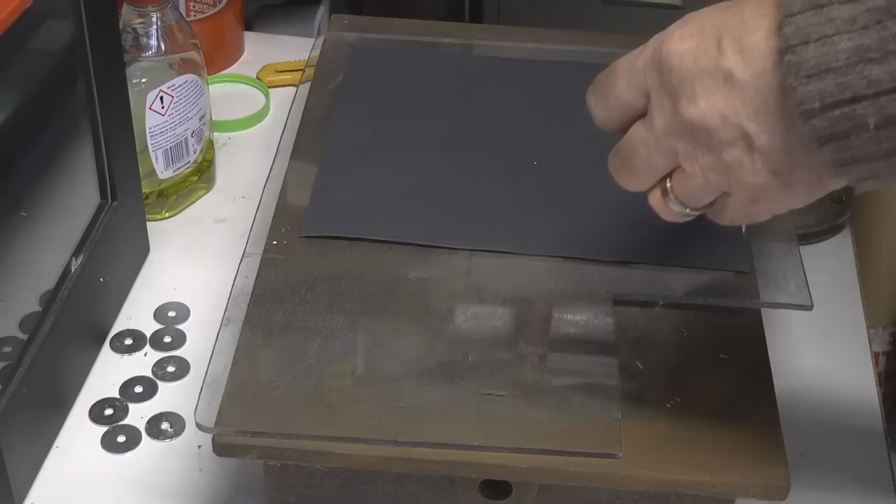I'm still a bit obsessed with making copper mirrors because I do believe that they are going to be a very cheap option that most people could make for themselves, provided we get the method of manufacture correct. And I'm tackling the problem a slightly different way today.

I have here a sheet of 1200 grit wet and dry, which I'm sticking down to a piece of 6mm Makrolon, which is nice and flat. But the main difference between this and the previous approach that I had was that I'm making all three together. Here I've got a piece of 1/2 inch thick steel.

Now it doesn't have to be steel, it probably could be 1/2 inch plywood, for example, and it would probably work just as well. But what I've done, I've fixed my 3 mirrors with screws. If you remember, my mirrors have hank bushes on the back. So I've got my washers there which are pulled back against this flat surface.

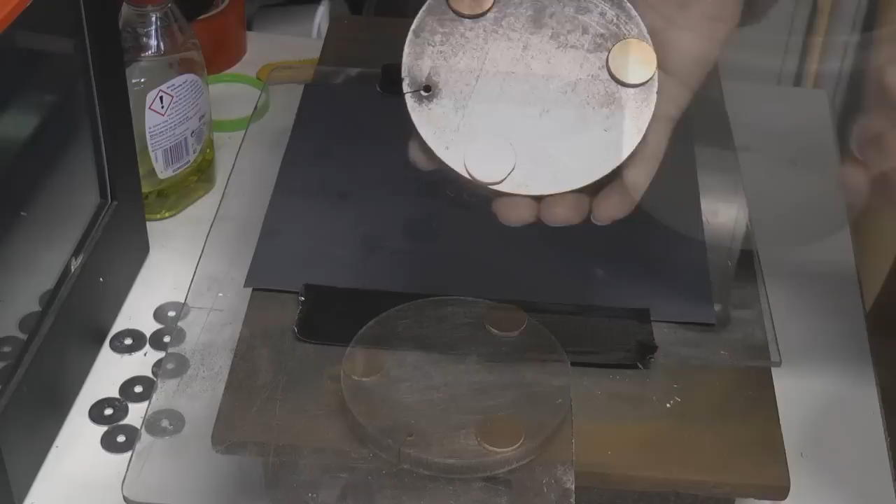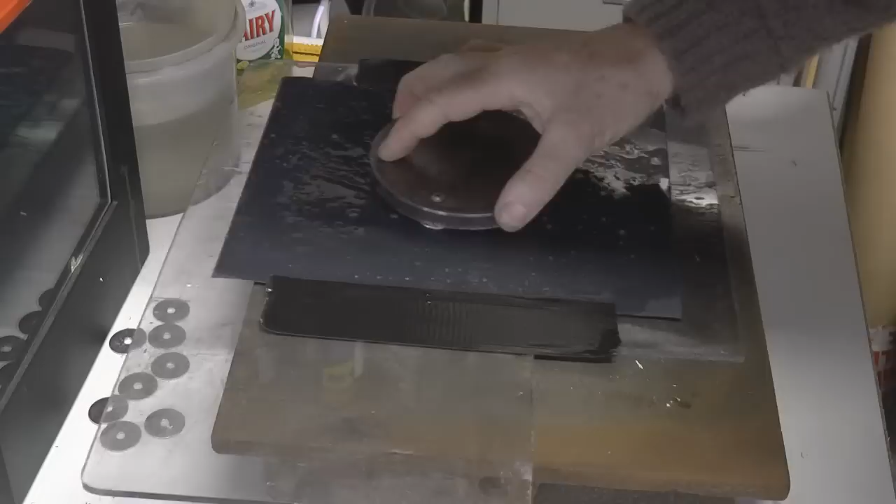Add some water and some washing up soap, and we'll see how flat we can get these. Now I've been told that the ideal thing to do is to work these in a figure 8. And also to keep rotating them.

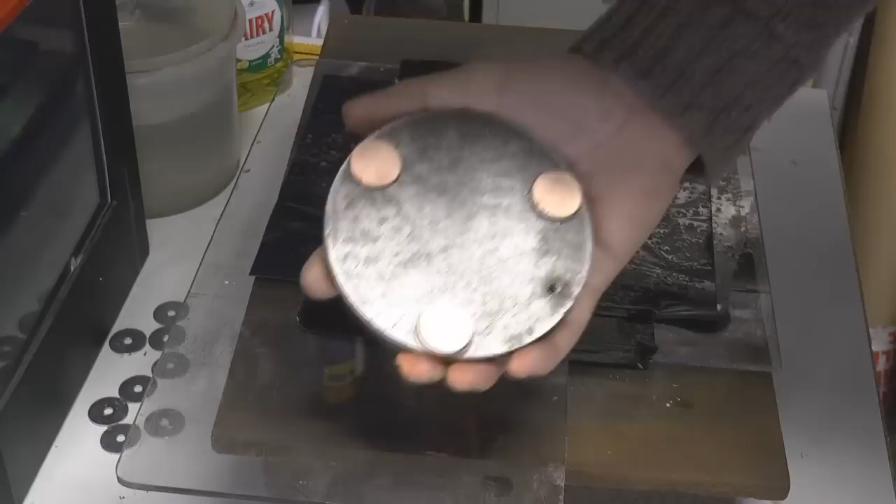Now this is quite heavy, so I'm not applying any load to it. All I'm really doing is just moving them around. Now I've got no idea how flat these are at the moment relative to each other. Well, I think the answer to that question is they're not bad, because there's just little spots on there at the moment that have not cleaned up. But they're not bad for flatness.

So it's not going to take very much effort to whittle these back to flat. Well, 2 out of the 3 look fairly flat. That one there looks as though it might require just a little bit round here. They're coming flat very quickly.

Now I know that polishing with cloth is likely to round the edges, but as we're only interested in the central 10mm section, it won't really matter if the edges get a little bit rounded, but cloth will do a great job bringing the polish up quickly. Now what I'm going to try and do is to stretch the cloth on here and tuck it over.

Now here we've got our polish that we're going to use. It will naturally get spread around once we start working it. And again, I suppose for the purists we ought to use the figure 8 technique. Again, I'm just moving this plate around. The weight of the plate is quite heavy. I mean, it probably weighs, I don't know, 4 pounds.

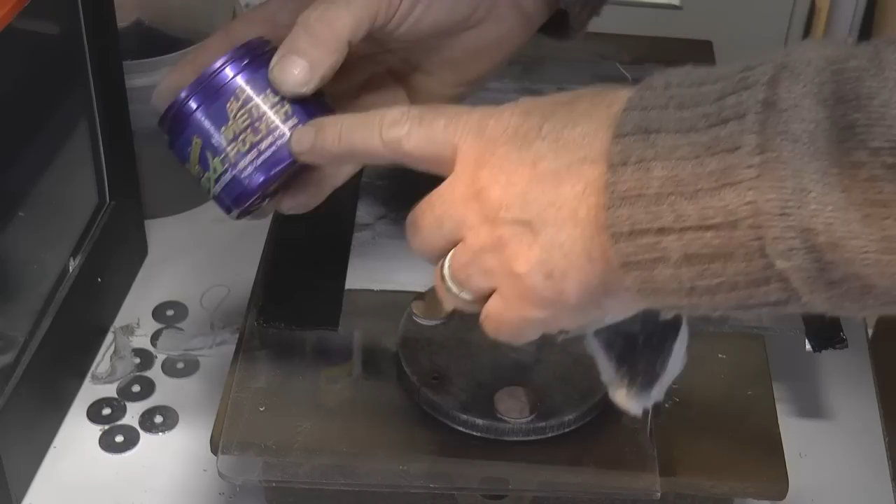Now, I was a little bit worried about not cleaning the polish off of this surface, as it's got anti-corrosion protection in it as well. So it leaves some sort of surface film over the copper, which on the one hand will help to stop it tarnishing in the atmosphere, but on the other hand, potentially it could burn onto the surface and change the reflectivity of the surface.

But it doesn't appear to be doing that at the moment, so I'm not going to clean it off. That's 5 minutes worth of wet and dry, and 5 minutes worth of polishing. They've come up extremely well. So it's taken 10 minutes to produce 3 mirrors, plus about another 15 or 20 minutes to make the mirrors.

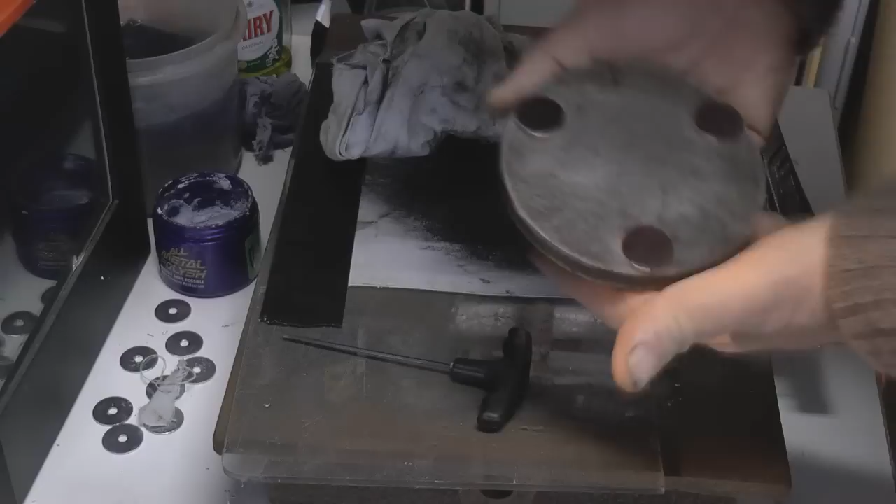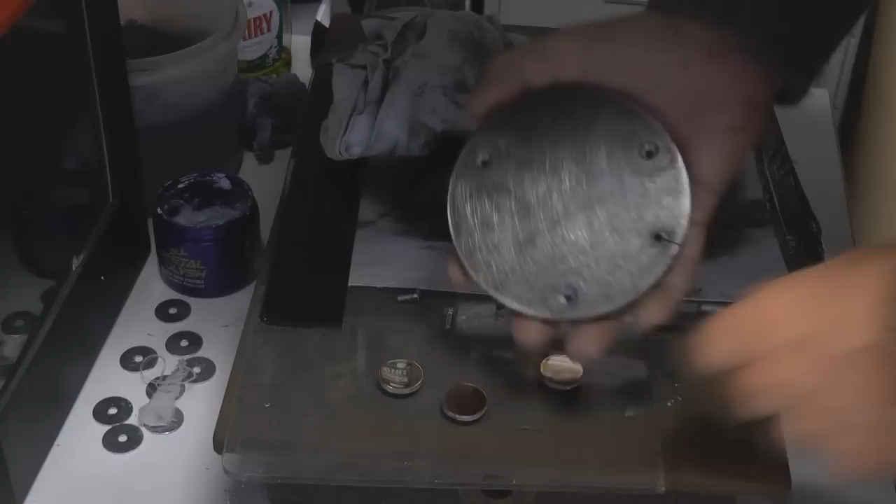So, if I've spent an hour in total making 3 mirrors, that seems like a pretty cheap set of mirrors. Let's go and find out how they work, should we? Because these, I think, are the best mirrors that I've produced. And there's my plate with counterbored holes in it to take the hank bushes. These are round hank bushes as opposed to hexagon ones.

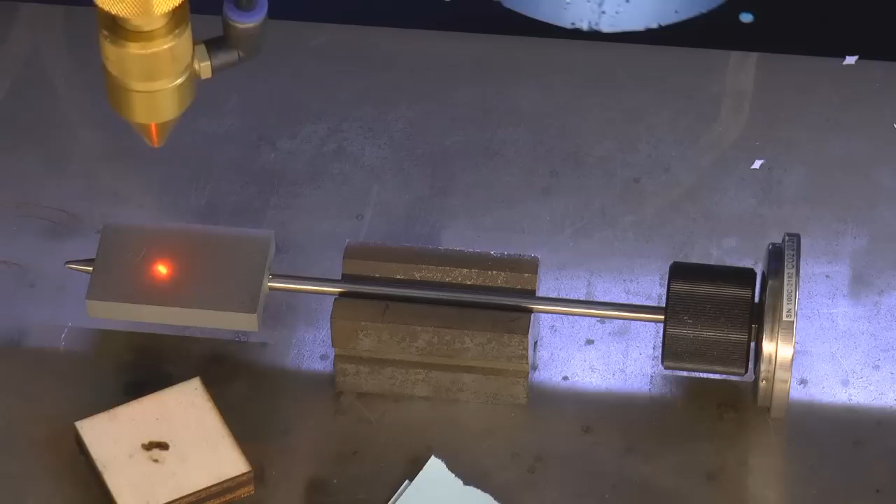Well, we've got a few consistent results there, so I think we'll quickly change the lens. So if you remember before, in a previous session, I mentioned to you how dangerous this zinc selenide is. It's actually a very toxic material, and after I'd read the data sheet, you won't see me handling these lenses again without my cotton gloves on.

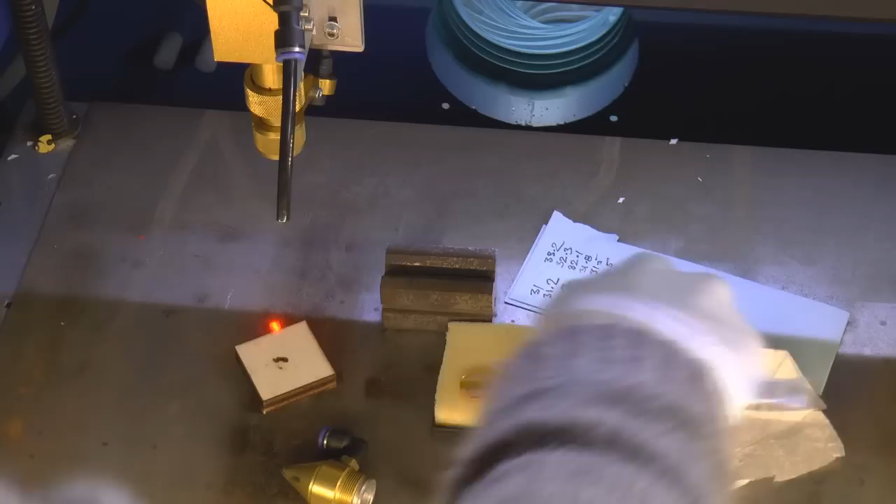Well, that's the new lens. It's an HQ lens. Now, whether or not it means it has any better surface reflectivity, I don't know, but we will just have a quick comparison with the lens that I'm going to take out. It almost looks as though that isn't coated at all, but having said that, when you hold it up to the light, when you catch the light across it, there is a bit of a surface coating on it. It looks a little bit misty and cloudy on that surface there.

Zinc selenide only transmits in its raw state without any protective coating on it. It only transmits about 70%, the other 30% is reflected, which is why we go for coated lenses, because that coating can actually raise the transmissivity of this lens to as high as about 99.5% or better. So I'm very hopeful that I'm going to get probably another 2 or 3 watts out of this head now. So we just make sure we put this in the right way, which is convex side away from the work.

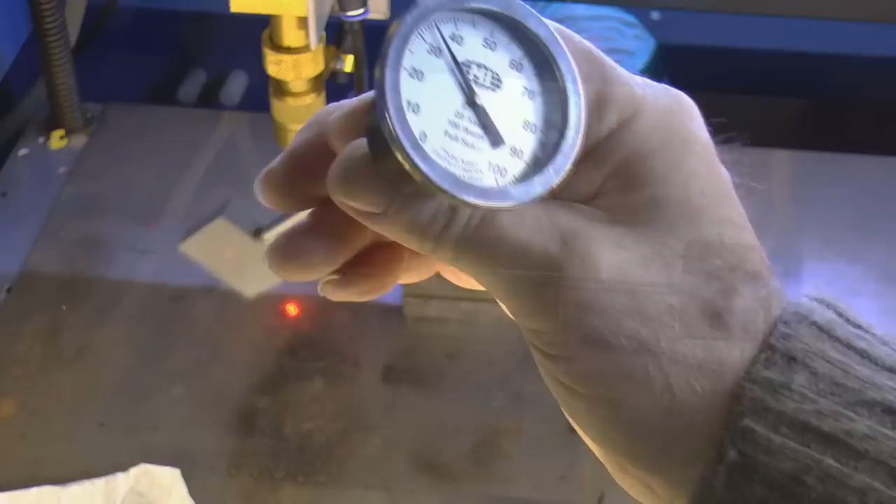So that's about 34.2. So if we take a look at those results there, we see typically, well, if we're kind about this, we say we are nominally 32. And if we look at these results here, well, they started off low, but they seem to have settled down quite a lot higher. Judgment call, what should we say, 34?

Now 2 watts doesn't seem a lot, but when you consider I was typically calculating 8 to 10% loss through the lens. So if we started off with about 33 watts before the lens, then we'd finish up with about 30 watts after the lens with a 10% loss. So it means we were losing 3 watts through the lens. Now it would appear that we're only losing 1 watt through the lens, which is a significant gain.

So now what we should do is work our way back through the system. We'll put my new set of copper mirrors in to see whether we can wring any extra watts out of the performance of this machine. Well, I'm now going to upset my mirrors and change the mirrors, so it means I shall have to take them out and physically upset all the settings. But before I do that, what I'm going to do is to set up my pointer so that we don't have to go back and reset everything. I should be able to just use this as a reference.

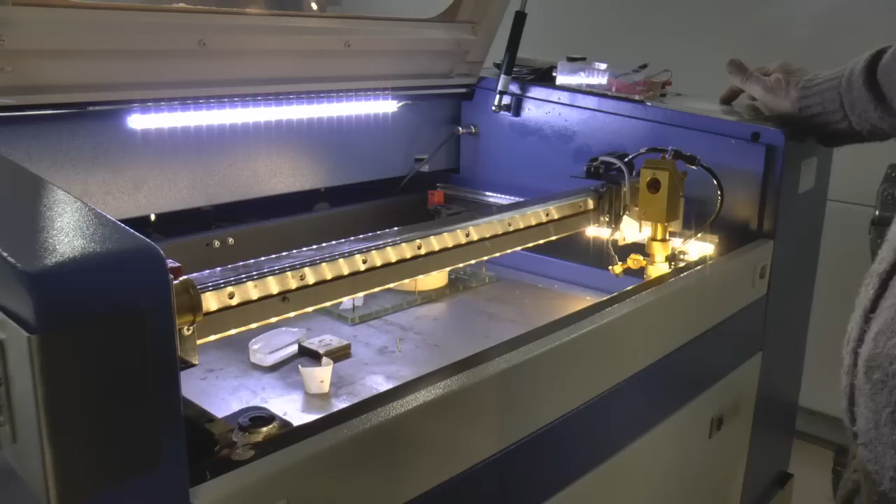Right, before I upset any of my settings, I'm going to put the laser right at the front of its stroke where I can get to these screws here, and I'm going to do a little pulse test just here. I might need to tweak that at a later stage, but that's where the laser is pointing at this very moment in time. So now what I'm going to do is turn the laser off. So the laser is now turned off and safe.

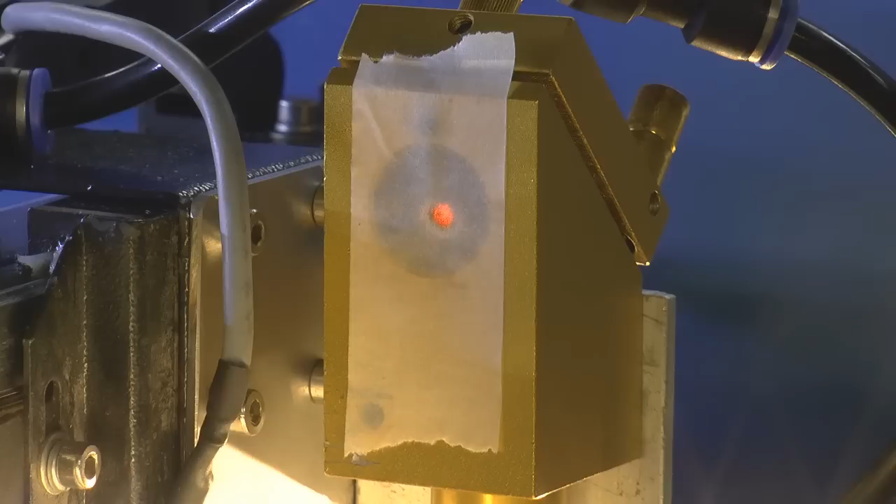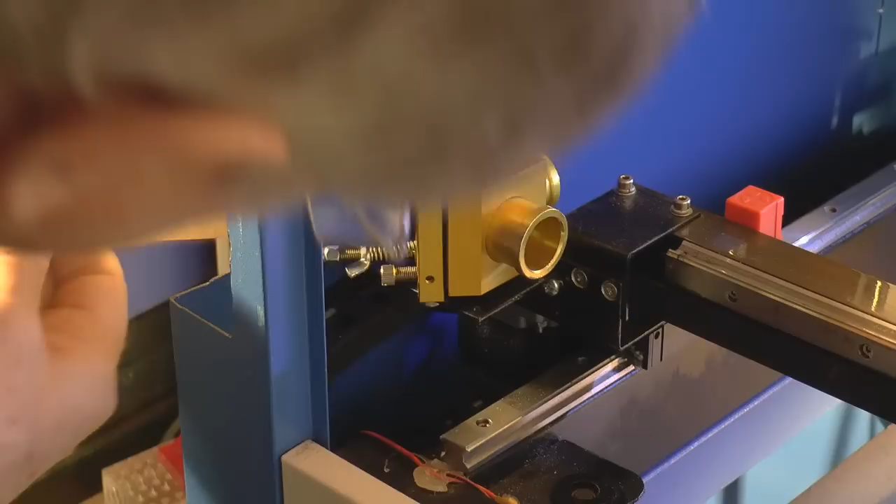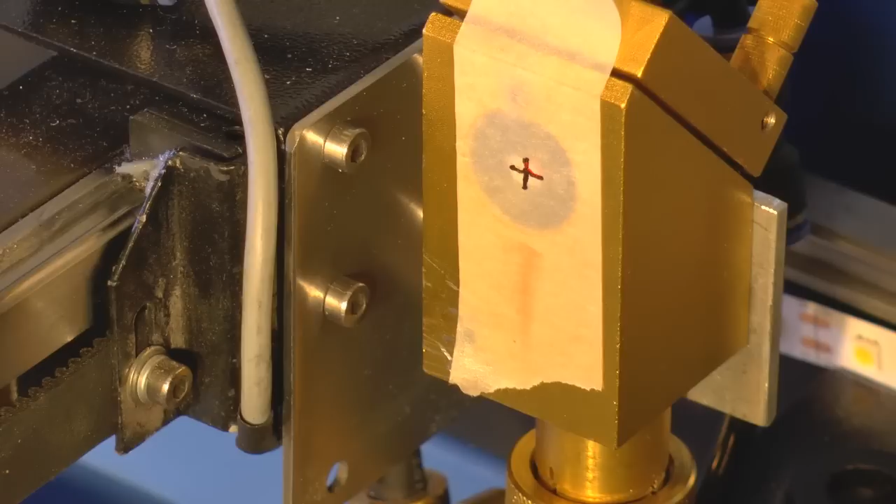Right, so there's the pointer on there. Just fiddling with these two screws. Take it down and show you there. So mirror number 1 goes in there. And now that I've done them back up again, all I've got to do is just gently tweak that top screw to bring the mirror down a shade, and there we go, back on target. It's as simple as that. Now I'll go and replace the mirror at the back.

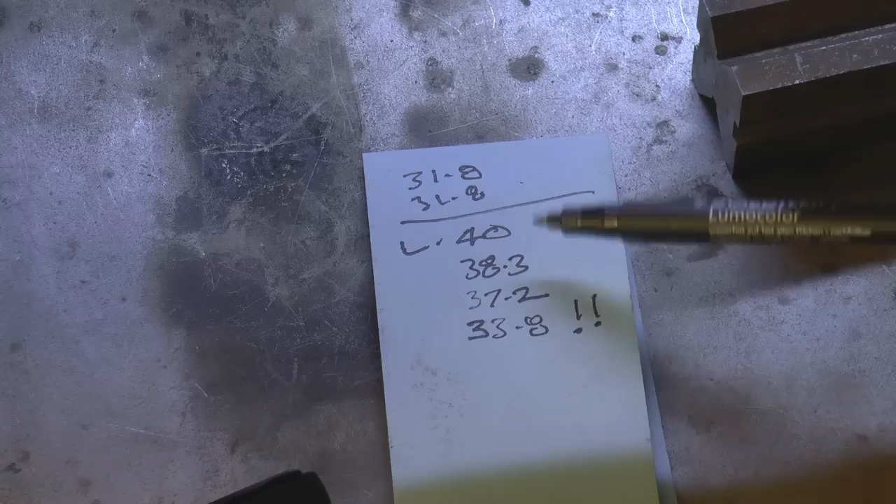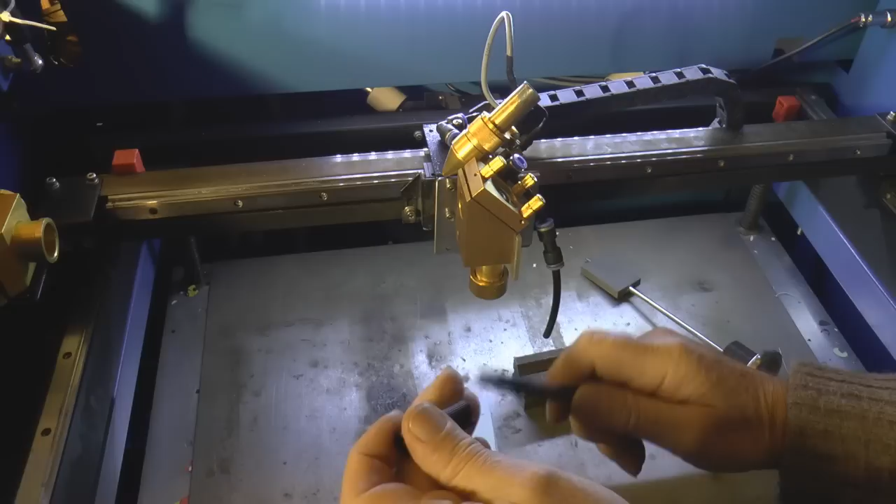A quick run round the light path tells me that we've got 40 watts coming out of the laser. We've got 38.3 after the first mirror, 37.2 after the second mirror, and then we get this massive drop of about 3.4 watts just through that one mirror, whereas in fact I got less than 3 watts across the previous 2 mirrors. So we've definitely got to look at this particular mirror here, and what I'll do, I'll swap this mirror over for the mirror that I took out the back corner. And we put our number 1 mirror in from the previous batch of mirrors.

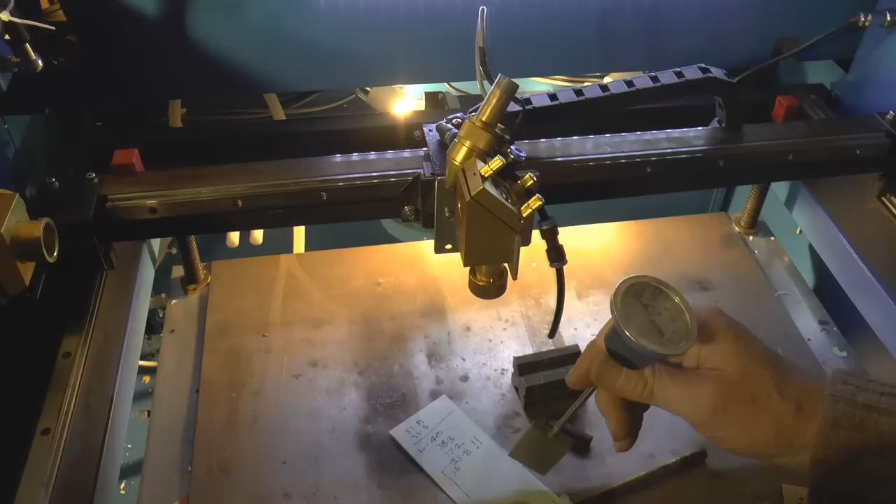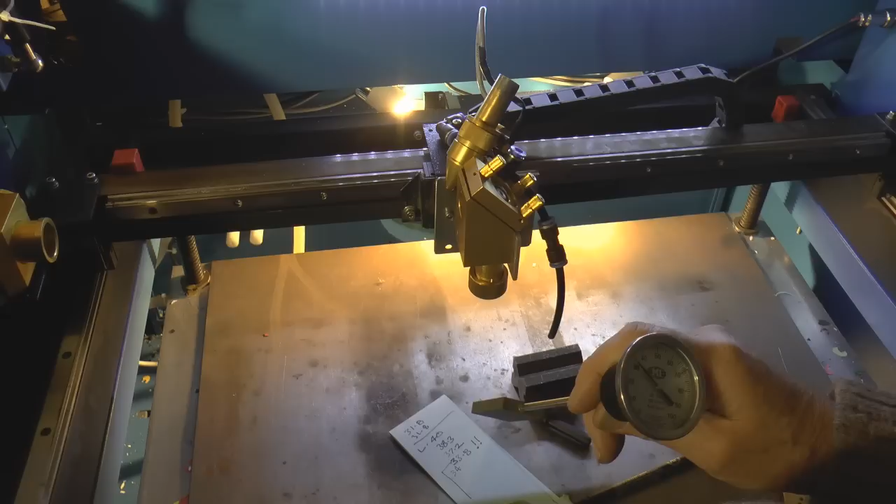Well, that's not a lot different at 34. It's really weird. It's not the first time I've come across the problem that this mirror here, whatever I do to it, seems to be losing more than any of the other mirrors. Because the laser beam is turning through 90 degrees here, it's in a different plane. It shouldn't make any difference as far as I can see.

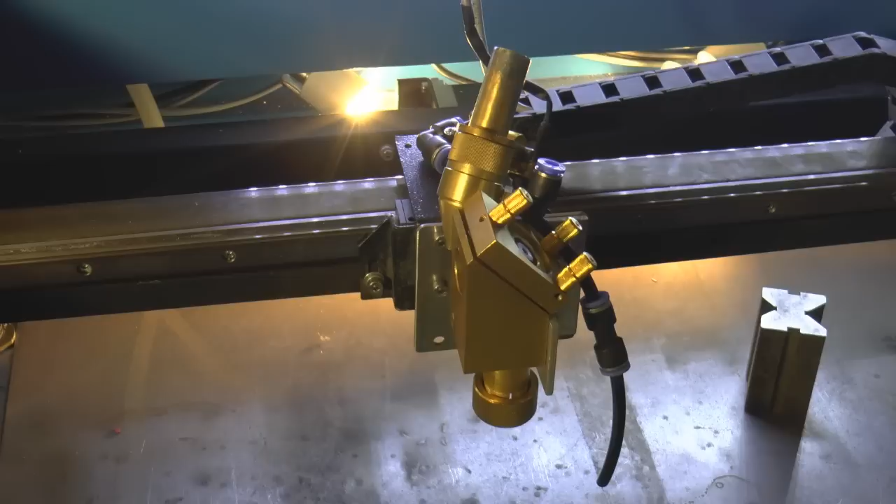Well, I'm really puzzled about that, why I'm losing so much just there. So what I'm going to do is to rip this head off and have a look down that tube to see if there's anything sticking out or in the way.

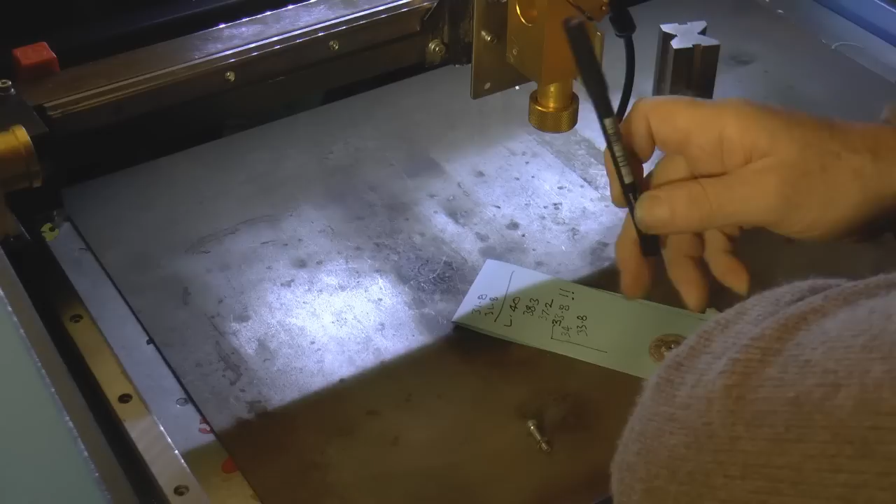I think I need to just do a bit of a drawing of that head and see where the centre of that mirror is in relation to the centre of this hole, because maybe that's where I'm going wrong. But there always seems to be a problem with that mirror, and the only thing I can think of is that somehow the beam is clipping the mirror and not transmitting all the power downwards, because I've noticed it before that this is the mirror that's causing the problem.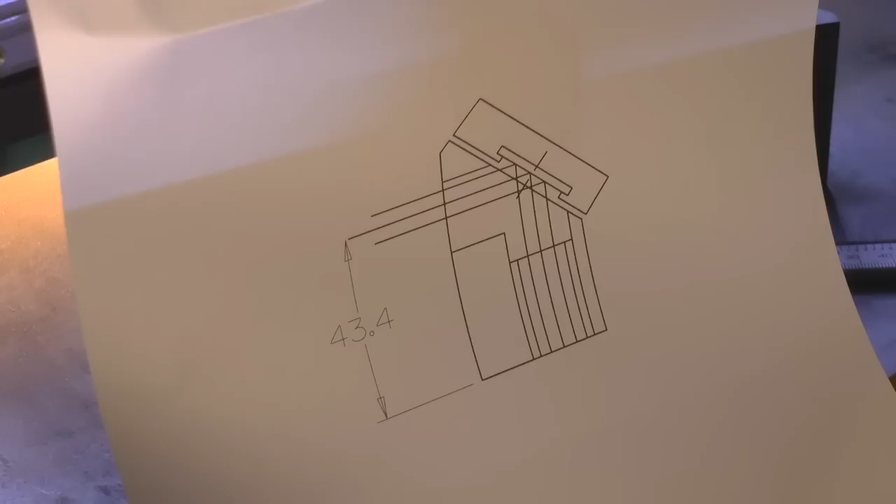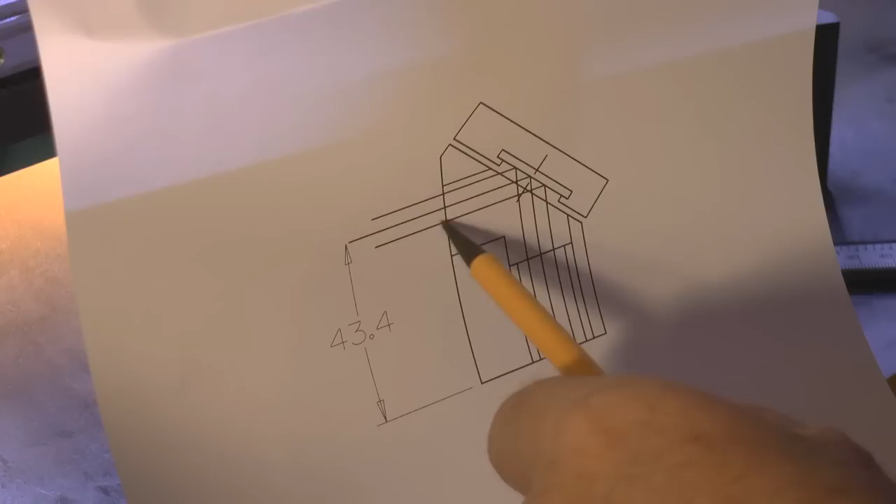Well, you see that little insight there has all of a sudden thrown up quite a major problem and a solution, because when I draw this out and look at the measurements of it, to get the laser beam going down the centre of this tube, the mirror is in about the right place, give or take a millimetre. So that's not the problem, but it's this entry hole. Look where the mirror is in relation to this entry hole. I've been setting the mirror here on centerline, and it's at least 3.5 millimeters too low, which probably means I'm clipping the edge of this mirror here.

So I'm going to mark my head out and reset my head so that the beam goes in at 43.4, give or take a little bit. I'd like the purists to look away, because this is not the way to treat a vernier, to use it as a scriber. But this was only £12, so hey, I've got several of them in my workshop, and I just use them like this.

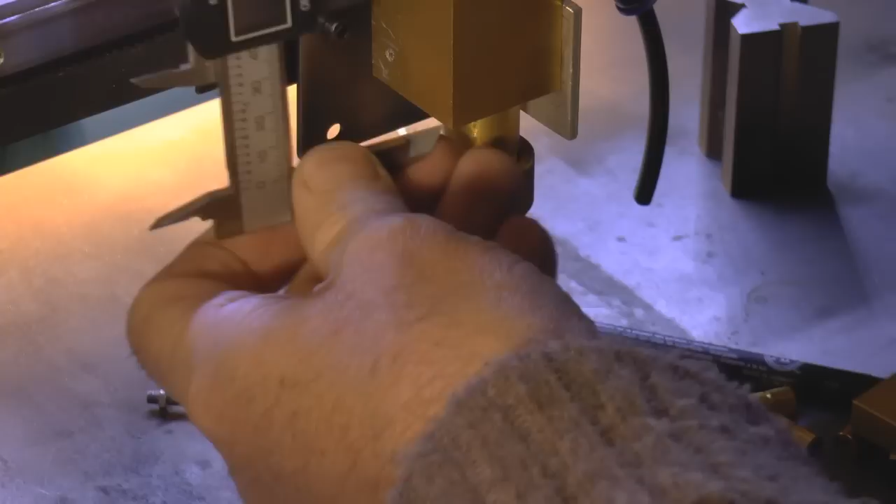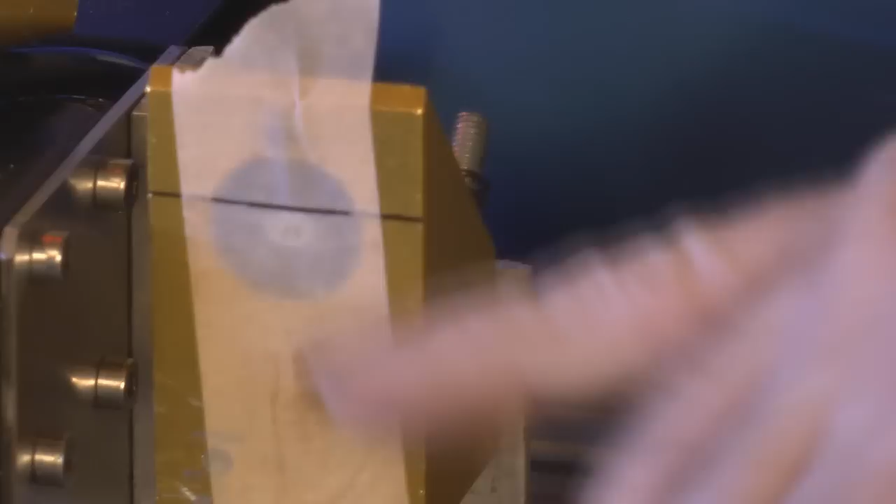So there's a line there. Look where I've had to mark that line. That's where my beam has got to be. So that's the beam at its extreme point. Let's see where it hits. There we go. We can see where it's hitting. It's a good, yeah, 3.5 millimeters low. Your first reaction would be to jump to mirror number 2, which is back there at the other end of this axis, and adjust the beam up slightly.

Wrong. The beam is already set along here, both parallel in that direction and in this direction. So all I've got left to do is to adjust this head up and down. And now all of a sudden we can see the reason why I've got these adjustments here. It's going to be very easy for me just to undo those screws and drop that down by 3 millimeters. Just nip that up very lightly, because I need to check the squareness of this face as well. Now I'd normally do that adjustment with my red dot pointer, but it's such a simple adjustment I'm not even going to bother. So let's just quickly blip that again.

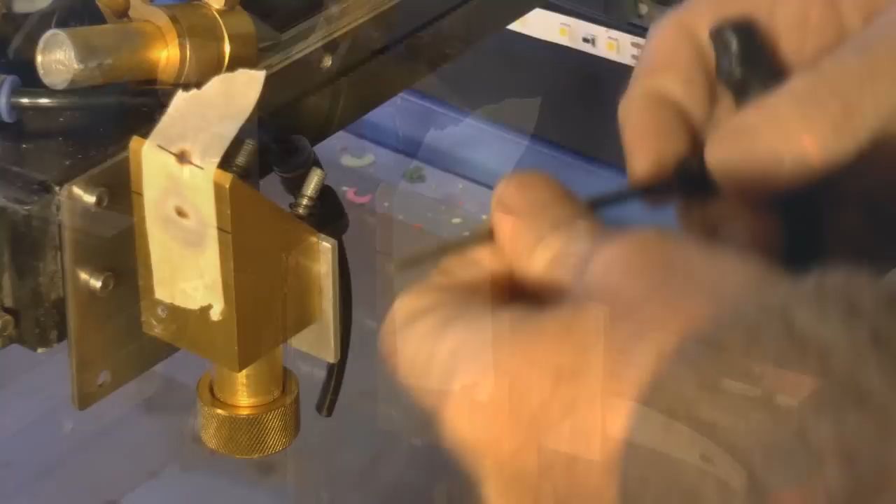And you can see now I'm slightly high, and I think we're probably on centre, but let's check it. That looks pretty good. Maybe slightly over to one side, but we can set that in a second. Right, well I need to just slightly move that head out by a very small amount. Let's try that, check for squareness. And we'll see whether we fixed the problem that I didn't know I had.

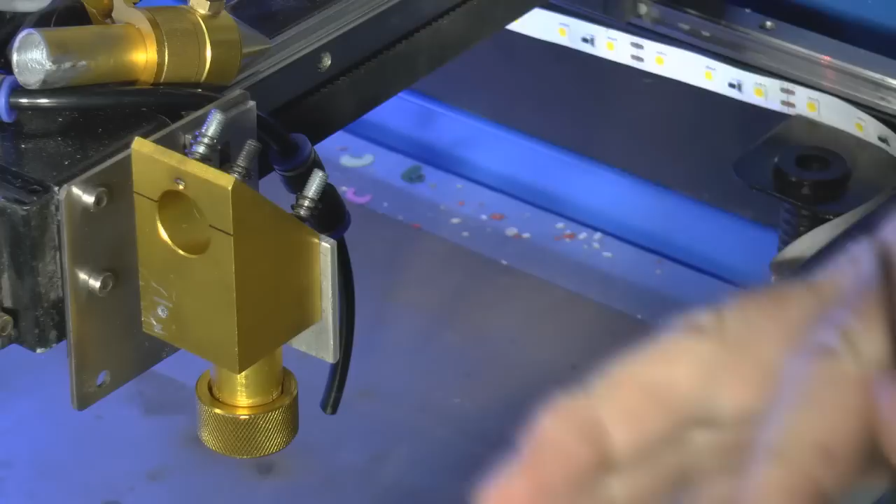I think anybody with this design of head would not have identified a problem there unless they had a power meter. And even with my power meter, I didn't really identify the problem until I'm looking for such small amounts that I didn't know that I'd lost 2 or 3 watts there, probably because the beam is clipping the mirror. So that's now 1.5 millimeters parallel and 45 degrees. Now that's a good nominal starting point for getting the beam to go down the centre there.

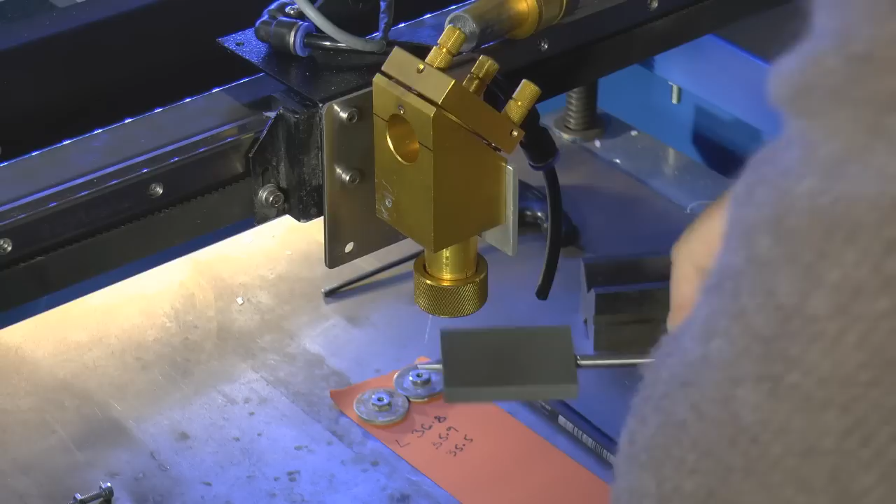Well, we're running a set of results now that are done one after the other, because this machine has got a tendency to perform rather erratically over time. I mean, earlier today we were seeing 40 watts out the tube. Now I'm seeing 36.8, 37. It might even be 35.6, but we'll give it the benefit of the doubt. And now the moment of truth. Nearly. Because we've still got to go put the lens in now. 33.1. I'll just carry out that test one more time. It just made 34.

I think you can probably see down the inside there that that's shiny. That's because I've already drilled this out to as big as I can get it, to about 15 millimeters or something like that, 14 millimeters, to try and make sure that there's no way that the beam hits the tube as it passes down the middle there.

Now they look a pretty impressive set of figures. Not necessarily as far as power is concerned, although it looks as though I'm at least 4 watts more than I was expecting to get out of this machine. I've always considered this to be a 30 watt machine at the working face. Now I've got another 4 watts. Wow. Let's go and have a look to see what and where we've gained.

Now I can see here 35.5, 1.5. That's quite a big drop there. But if you remember, I swapped my new mirror for my old mirror. So perhaps before we disappear, we ought to just go and take my old mirror out and put my new mirror in.

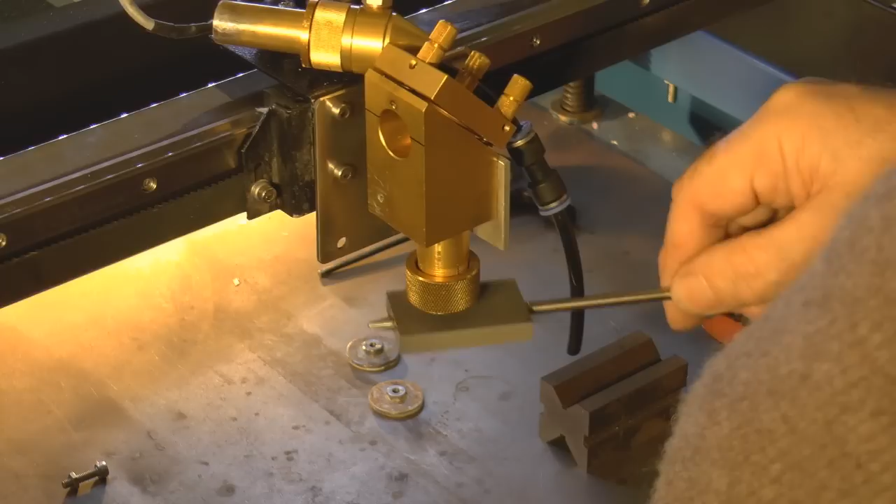The new mirror is now giving me 35.1. Yep, that was a good result. Wow, that did just about make it up to 34. So we will just check that one more time. Yeah, just about made it up to 34 again, so we've got to accept that result.

Let's go away and take a quick look at the results and see what they actually mean now with my new set of mirrors and my new HQ lens in. A few weeks ago I had a machine which was delivering 38 watts at the tube, and I was lucky if I got 30 watts down at the cutting face. And the first block of figures here represents typically what my machine was a few weeks ago.

I was absolutely staggered when I used my power meter in various parts of the machine to find this information out. I'm losing 25% of the available power through the light path. Not acceptable. Must be able to improve that somehow. Hence my search for better mirrors, better lenses. I already knew of the very high reflectivity of copper, but I never imagined I'd be able to make my own copper mirrors. But when I did a little bit of research and found that industrial mirrors are available, but they're about £40–45 each, I thought, no way, I'm going to have to go and look in my workshop and see what I've got.

The copper that we get commercially, a grade called C101, various countries have got different gradings for it, but it's 99.9% pure copper. It's used electrically and architecturally all over the place. And if you go onto eBay, you'll be able to find little scrap offcuts of copper plate. 2mm thick, 1.5mm thick, either will do the job. You can make your own mirrors very easily. So being the resourceful person that I am, why spend money when I can have a go at making them myself? I get the pleasure out of trying to solve the problem, and I could finish up with an expensive mirror for free.